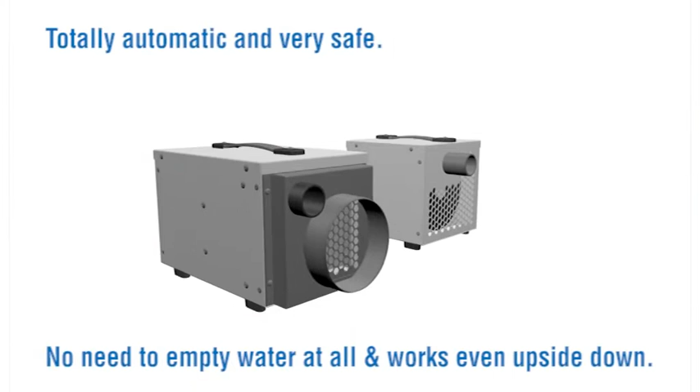EPD30 and EPD50 Dryfan Dehumidifiers, UK designed for the world market. Totally automatic and very safe. No need to empty water at all and works even upside down. Worldwide patented design that can be used from 104 degrees Fahrenheit even down to -4 Fahrenheit.

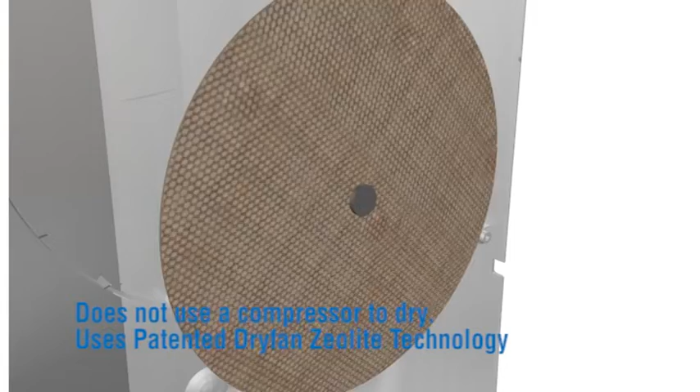Does not use a compressor to dry. Uses patented Dryfan zeolite technology. No water container. Water is not drained but vented away as vapor through a small duct. Not affected by power cuts, totally automatic, and safe to be left.

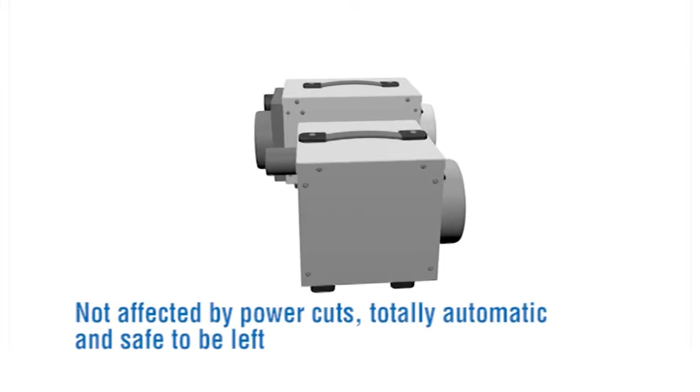Can be used with standard 115 volt or 60 Hz mains electricity or DC to AC converters. Probably the smallest dehumidifiers in the world. Can be hidden in cupboards, ducted and placed on shelves, ceilings, or walls.

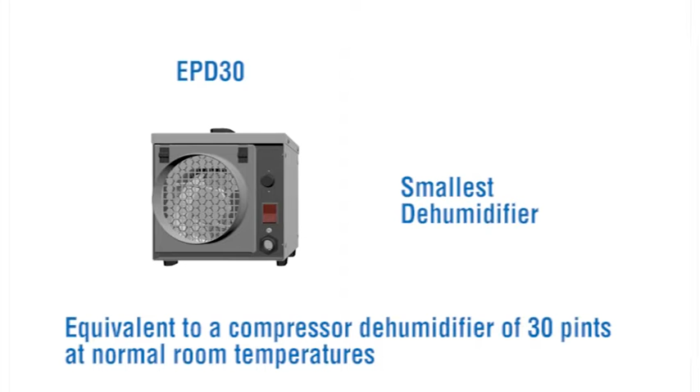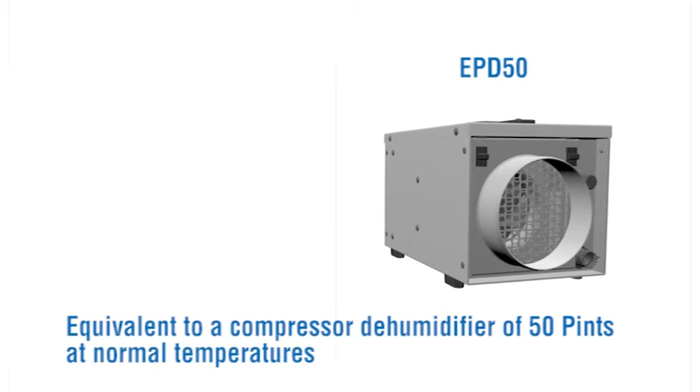EPD30's dimensions are 8 inches by 8 inches by 8 inches with a 17-pint capacity, the size of a child's shoebox. It's equivalent to a compressor dehumidifier of 30 pints at normal room temperatures. EPD50 is 8 inches by 8 inches by 12 inches with a 25-pint capacity, the size of an adult shoebox. It's equivalent to a compressor dehumidifier of 50 pints at normal temperatures.

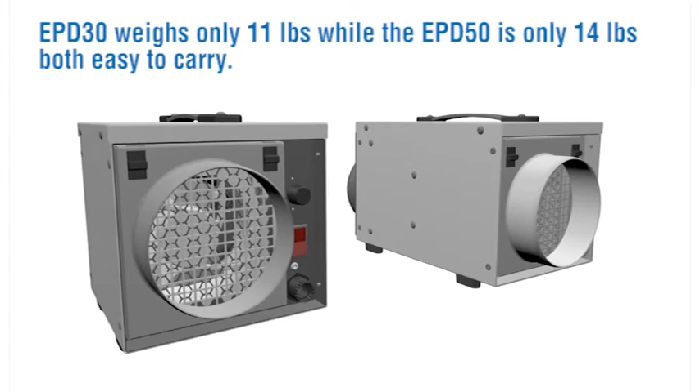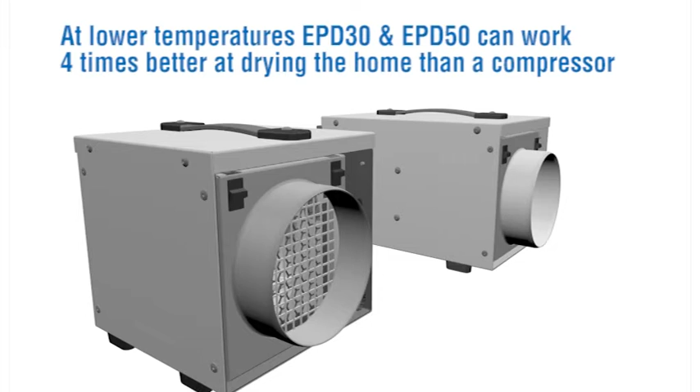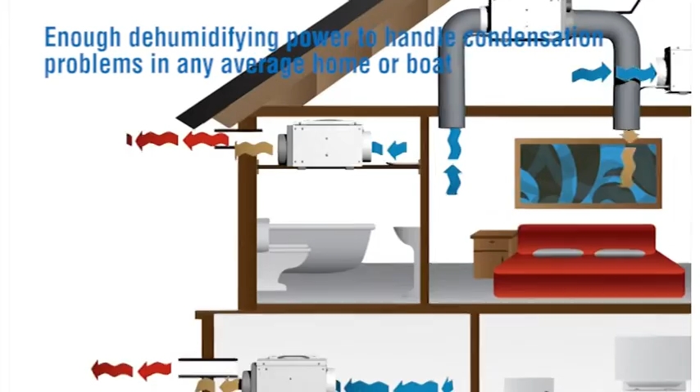EPD30 weighs only 11 pounds, while the EPD50 is only 14 pounds, both easy to carry. They perform better than traditional compressor dehumidifiers in many applications. At lower temperatures, EPD30 and EPD50 can work 4 times better at drying the home than a compressor. Better performance means better energy efficiency, saving money. Enough dehumidifying power to handle condensation problems in any average home or boat.

Both EPD30 and EPD50 are metal in construction inside and out, trade quality. Both Ecor Pro dehumidifiers are made from strong galvanized steel with white epoxy paint. Ecor Pro dehumidifiers are all tested to ETL and high commercial standards, making them very safe. Ideal for crawl and attic spaces, garages, RVs, trailers, bathrooms, basements, and vacation homes.

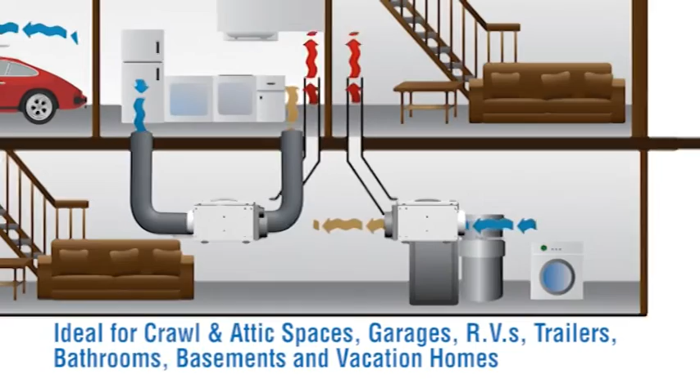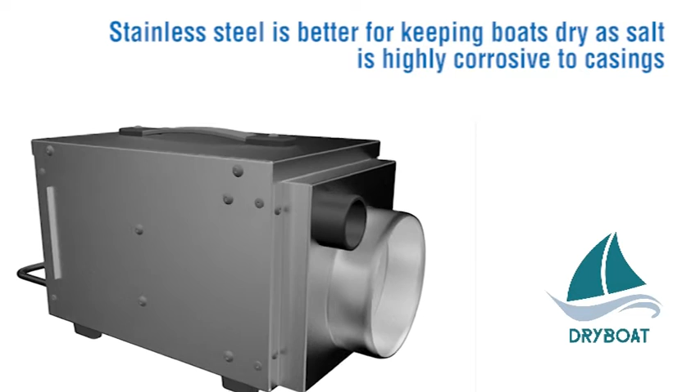Safety first. Ecor Pro dehumidifiers are rated for 24/7 use, unlike most compressor dehumidifiers. EPD30 Pro and EPD50 Pro versions are dehumidifiers made from stainless steel. Stainless steel is better for keeping boats dry, as salt is highly corrosive to casings. Ecor Pro Dehumidifier Pro versions are the same dimensions as the mild steel versions.

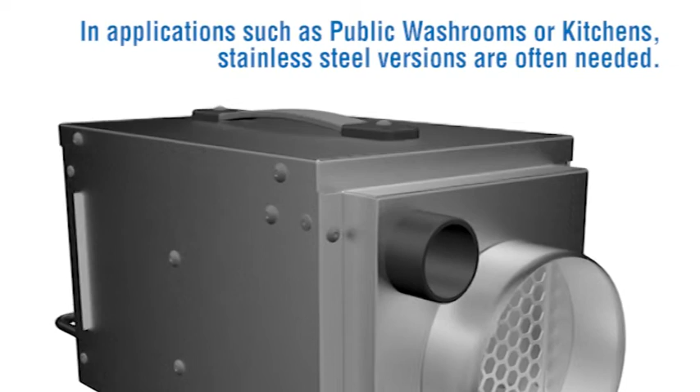Stainless steel is also ideal for schools, hotels, restaurants, and kitchens to keep food dry. In applications such as public washrooms or kitchens, stainless steel versions are often needed. Ecor Pro Dryfan technology means there is no water to empty, only water vapor to vent away.

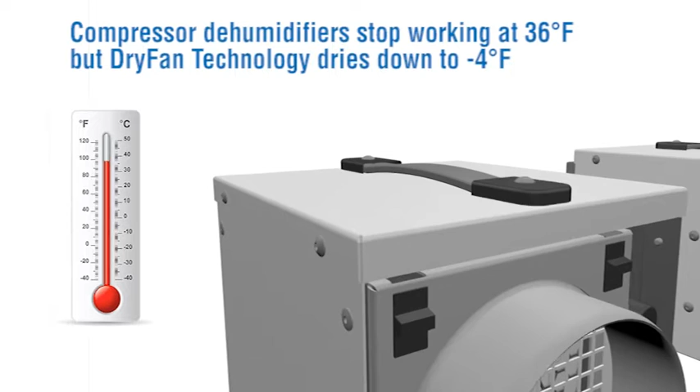Compressor dehumidifiers stop working at 36 degrees Fahrenheit, but Dryfan technology dries down to -4 degrees Fahrenheit. Low temperature drying is ideal for crawl spaces, attics, holiday homes, boats, and outbuildings. The only maintenance is periodic cleaning of the dust filter every 3 to 6 months once installed.

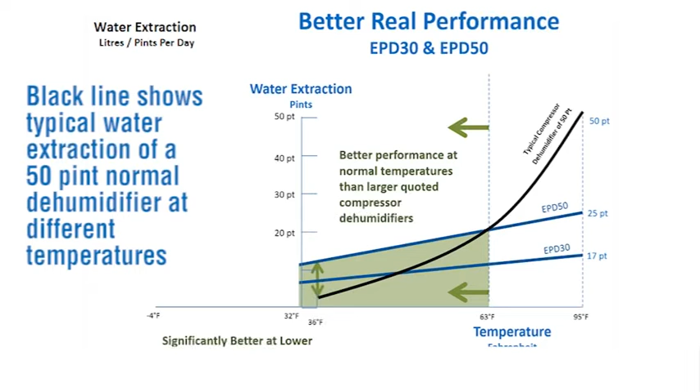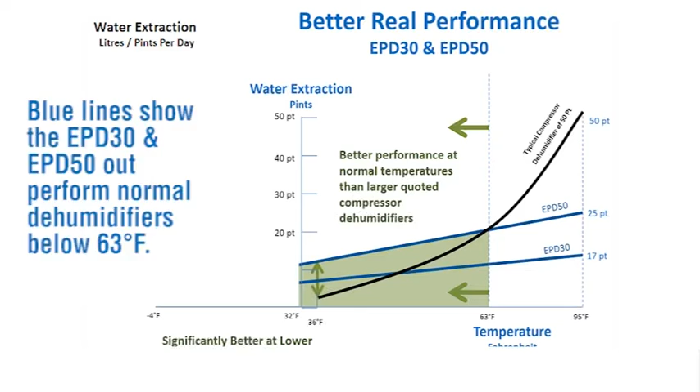Black line shows typical water extraction of a 50-pint normal dehumidifier at different temperatures. The blue lines show the EPD30 and EPD50 outperform normal dehumidifiers below 63 degrees Fahrenheit. Below 50 degrees Fahrenheit, compressor dehumidifiers work poorly. Ecor Pro units are often 3 times better.

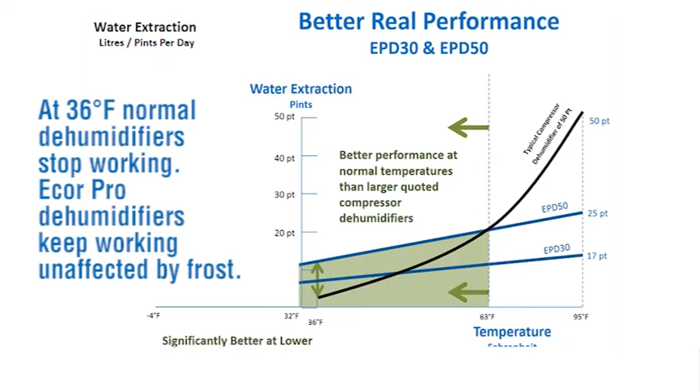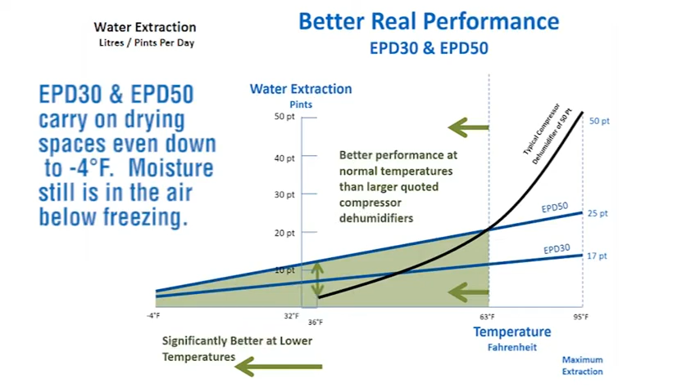At 36 degrees Fahrenheit, normal dehumidifiers stop working. Ecor Pro dehumidifiers keep working, unaffected by frost. Dryfan dehumidifiers handle even colder freezing temperatures. EPD30 and EPD50 carry on drying spaces even down to -4 degrees Fahrenheit. Moisture still is in the air below freezing. Ecor Pro units are ideal for unheated basements, crawl spaces, garages, and attics, even boats.

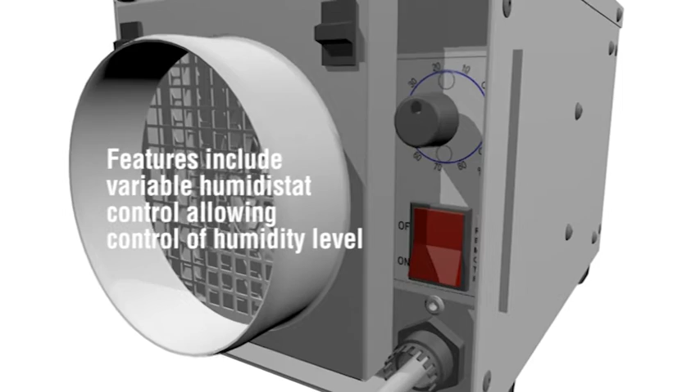Features include variable humidistat control, allowing control of the humidity level. The inbuilt humidistat regulates from 10% to 90% relative humidity, 10% continuously on. An optional plug-in humidistat is ideal if dehumidifiers are placed outside of the room being dried.

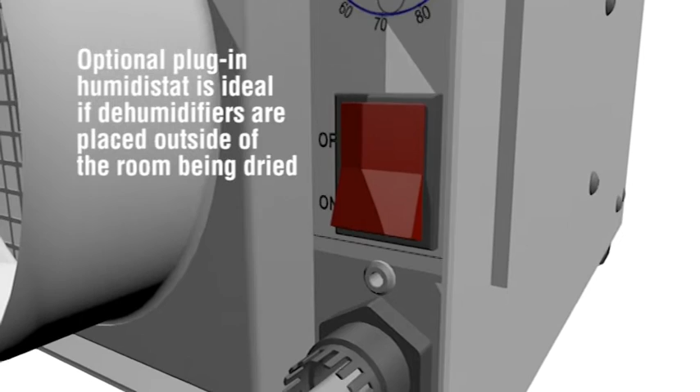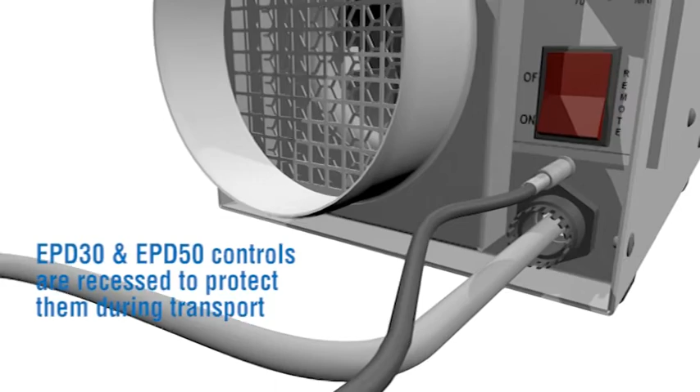The remote humidistat is connected quickly via the 12-volt jack plug into the provided socket. Remote humidistats are advisable when the dehumidifier is being ducted and outside the room. EPD30 and EPD50 controls are recessed to protect them during transport. A 15-foot power cord length makes for easy connection.

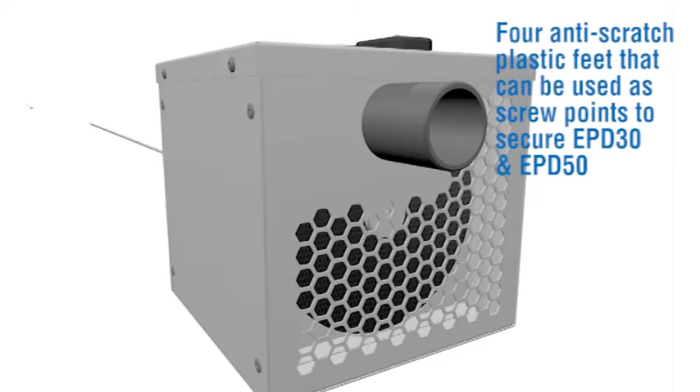It's easy to carry with one hand, so it's ideal for taking on and off boats. 4 anti-scratch plastic feet can be used as screw points to secure EPD30 and EPD50. There's no need to buy additional wall brackets for the installation. Screws or other fixings are not supplied.

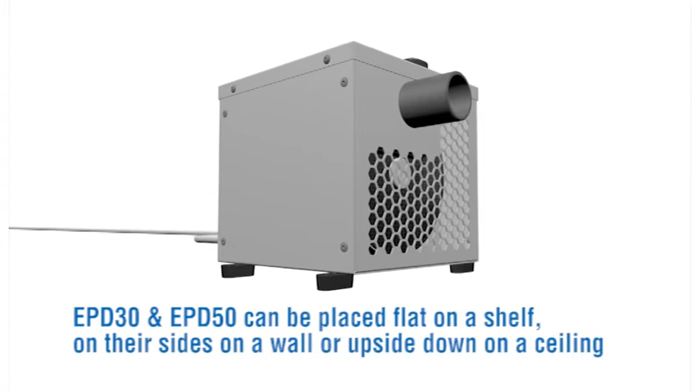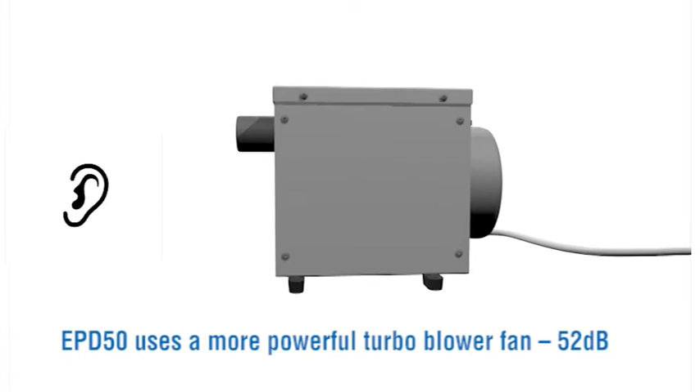EPD30 and EPD50 can be placed flat on a shelf, on their sides, on a wall, or upside down on a ceiling. Both EPD30 and EPD50 dehumidifiers are small, so they can be ducted and are easy to conceal in most rooms. EPD30 has an axial fan, similar to a large computer, 49 decibels. EPD50 uses a more powerful turbo blower fan, 52 decibels.

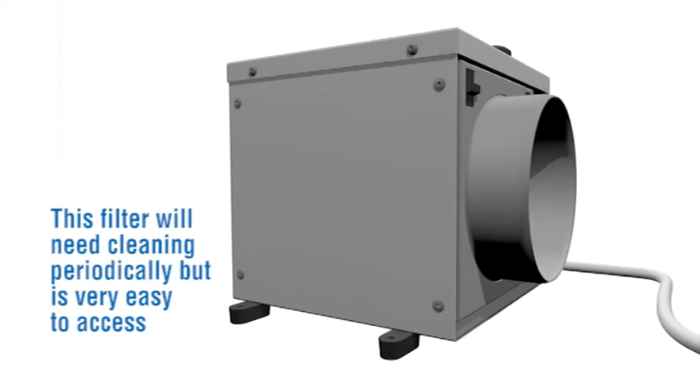Wet and dusty air is drawn into both dehumidifiers and is first filtered by the foam filter. This filter will need periodic cleaning, but is very easy to access. Depending on the space being dried, clean by vacuuming or gentle washing every 3 to 6 months.

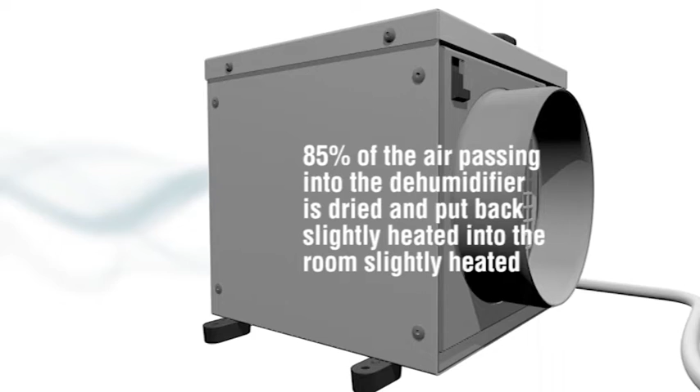85% of the air passing into the dehumidifier is dried and put back slightly heated into the room. The other 15% of the air contains all the water, and this can be vented to the outside. The exhausted air is ducted, usually via a 1.5-inch hose. Fit wider ducting if longer exhausts are needed.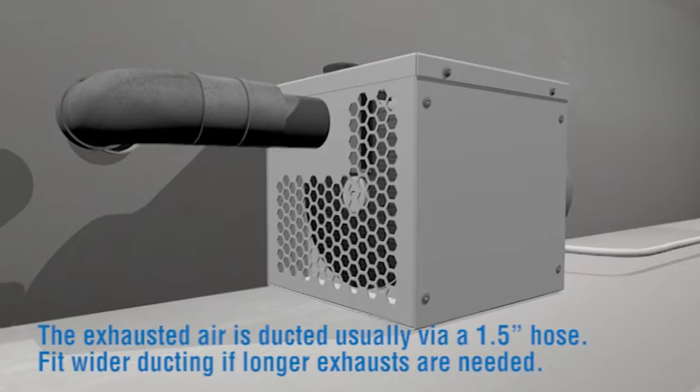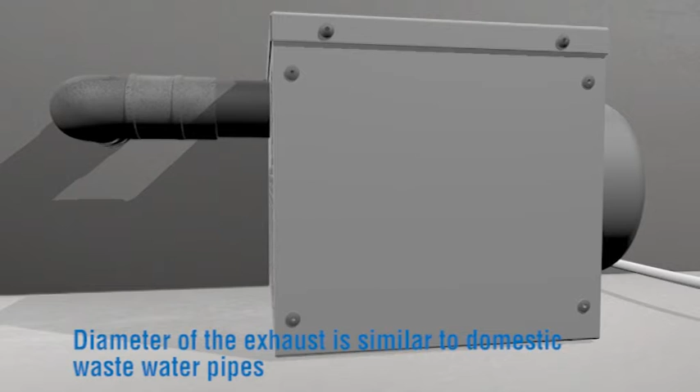Wet air out is exhausted as hot vapor and can even be vented vertically, ideal for basements. Diameter of the exhaust is similar to domestic wastewater pipes. Wastewater pipes are smooth and make ideal vent pipes, but flexible ducting can also be used.

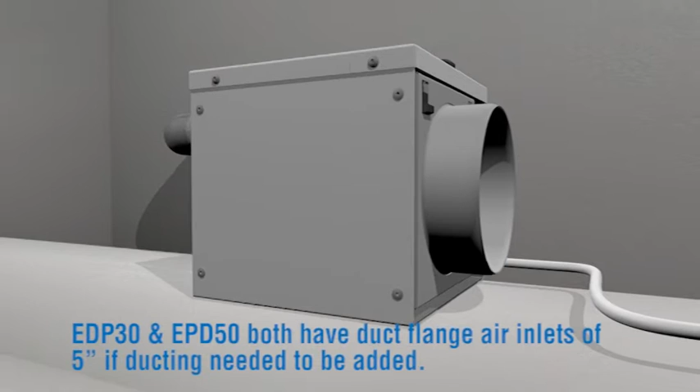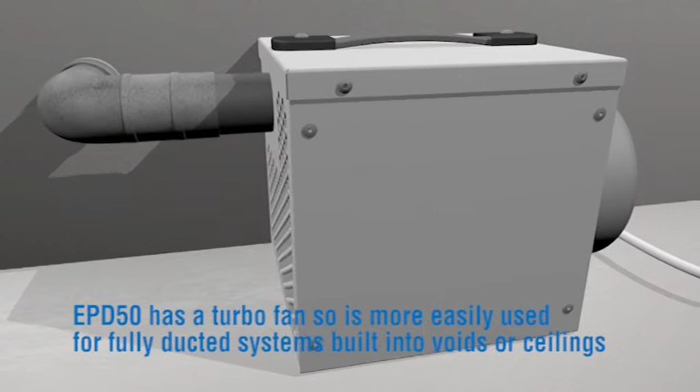EPD30 and EPD50 both have duct flange air inlets of 5 inches if ducting needs to be added. EPD50 has a 5-inch dry air out flange fitted, allowing dry air to be ducted also. EPD30 does not have a dry air out flange fitted. EPD30 is mostly positioned in the room being dried. EPD50 has a turbofan, so is more easily used for fully ducted systems built into voids or ceilings.

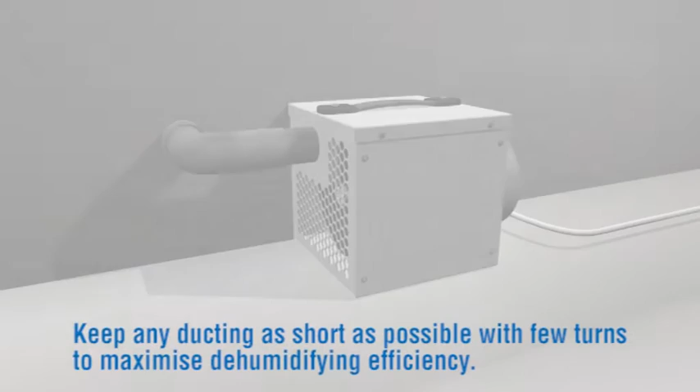Prevent condensation returning into the dehumidifiers with insulation on the exhaust if needed. Wet air out on long exhausts can cause water to condense inside the exhaust if not insulated. Decline the exhaust duct to allow any condensation to run away from the dehumidifier if needed. Keep any ducting as short as possible with few turns to maximize dehumidifying efficiency. Using wider ducting than normal will allow longer duct lengths to be added and improve efficiency.

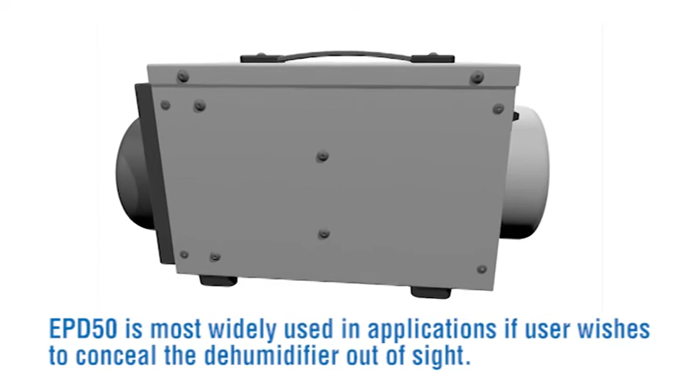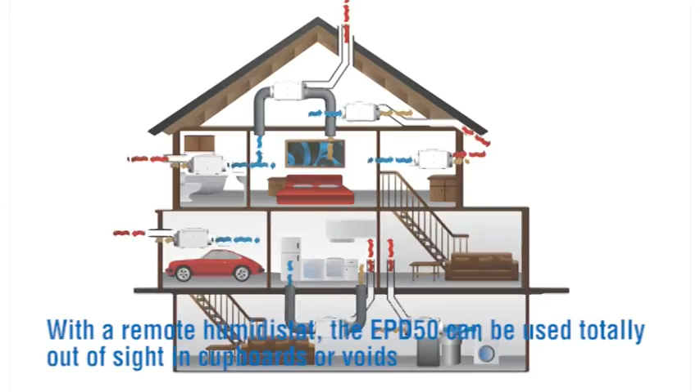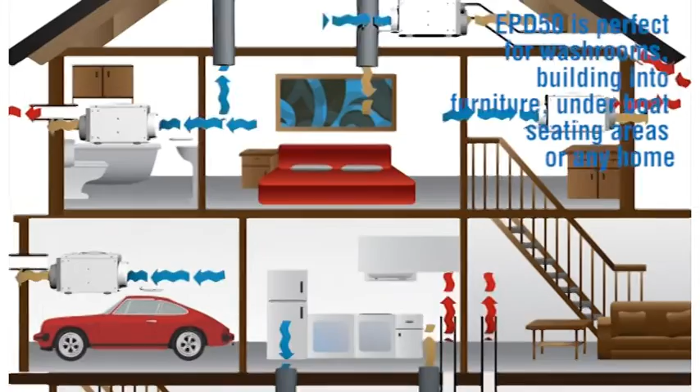EPD50 is most widely used in applications if the user wishes to conceal the dehumidifier out of sight. With a remote humidistat, the EPD50 can be used totally out of sight in cupboards or voids. EPD50 is perfect for washrooms, building into furniture, under boat seating areas, or any home. EPD50. EPD30.

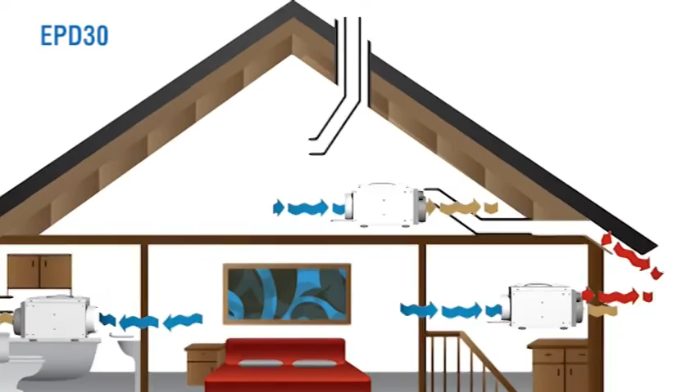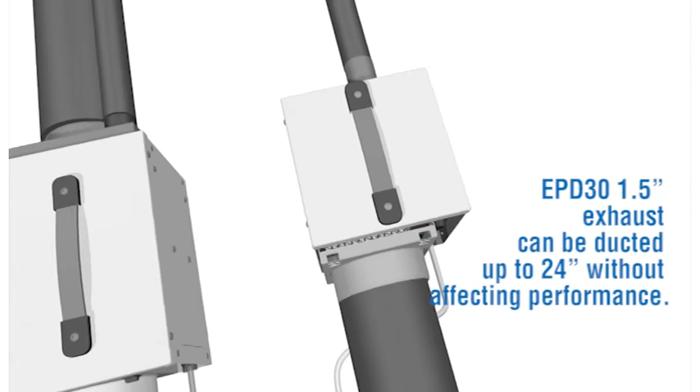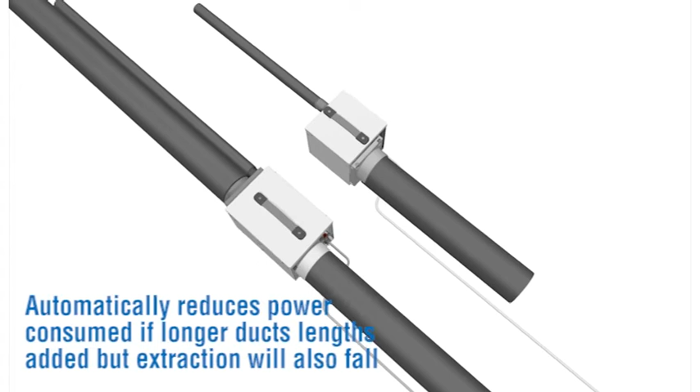EPD30 1.5-inch exhaust can be ducted up to 24 inches without affecting performance. EPD30 5-inch air inlet can be ducted up to 3 feet without affecting performance. It automatically reduces the power consumed if longer duct lengths are added, but extraction will also fall.

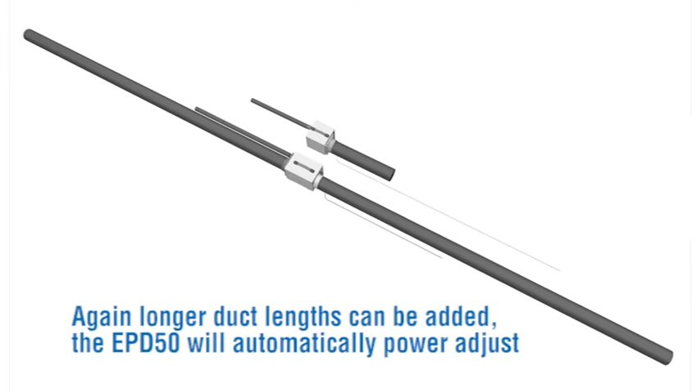EPD50 1.5-inch wet air exhaust can be up to 3 feet without affecting performance. EPD50 5-inch air inlet or 5-inch dry air outlet can be up to 15 feet without affecting performance. Again, longer duct lengths can be added. The EPD50 will automatically power adjust. Flexible ducting can also be used, but this is slightly less efficient than hard pipe ducts.

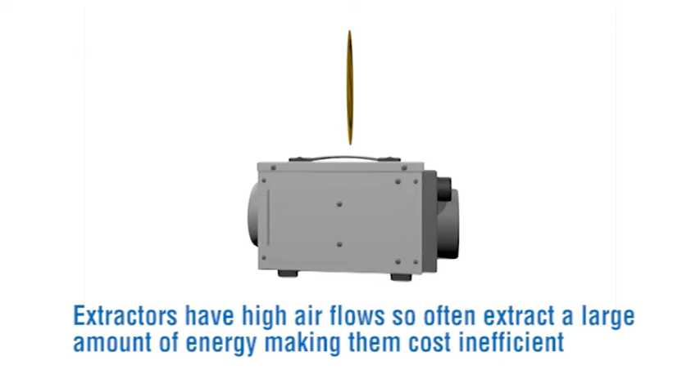DryFan zeolite technology is an alternative to home extractor fans. Extractors have high airflows, so often extract a large amount of energy, making them cost inefficient. EPD30 and EPD50 can save money using them as an alternative to an in-home extractor.

There are many other applications of Ecor Pro DryFan technology. Ecor Pro DryFan technology keeps anything that is affected by moisture dry all day and every day. It's ideal for protecting commercial storage of food, electronics, retail stock, and vehicle protection. It's perfect for protecting motel rooms, public washrooms, shop stock storage, and small farm buildings.

Protect your home from the harmful effects of condensation. Save money over alternative drying solutions with the brand new Ecor Pro DryFan technology. No need to empty water and very safe. The next generation of dehumidifiers, only from Ecor Pro.